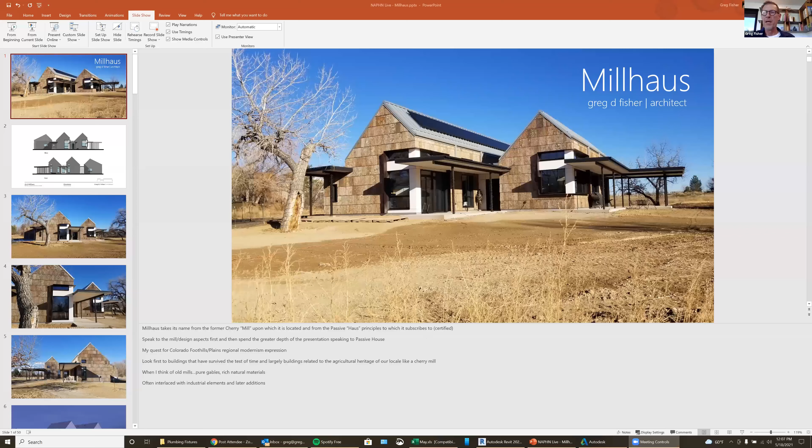So let me share my screen here. Are you all seeing that? Okay. Yep.

There we go. Okay. We call the project Millhaus, and the two parts of that: the mill is taken from the fact that the project is located on what used to be a cherry mill. Hasn't been for many years, but used to be a cherry mill. The original cherry mill structure is still with us, and it's to the right of this photo. It's a house now, doesn't look much like a house because it's been added onto so many times, but it

is indeed a house. And then the second part of the word, house, obviously spelled the German spelling H-A-U-S, and so that's sort of the passive house piece to the name and the metaphor. And basically, one of the things I've admired for several years is what's known in architectural circles as regional modernism. It's basically a form of modernism that is modernistic, but it still responds to a building's locale, as

opposed to maybe earlier editions of modernism, which somewhat ignored context and didn't think necessarily much about energy efficiency and performance and so forth, but made beautiful buildings that just kind of dropped onto sites. There's many examples all over the planet, but some that come to mind are Pacific Northwest and what Olson Kundig has been doing, and James Cutler architects. I also think of the work Lake Flato does in Texas and many other areas, and I think of Glenn Murcutt in Australia, just to name a few.

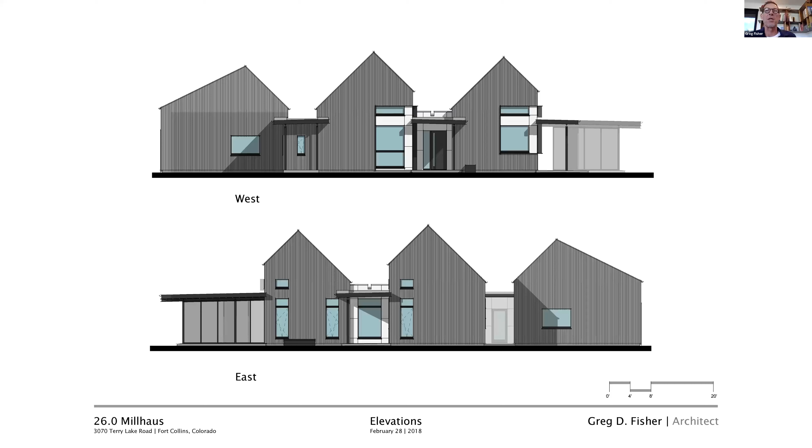And then to further enrich those more modern masses, we're again using natural materials. In this case, bark siding, echoing the cottonwood trees nearby, and then we have accents of white fiber cement panels at key areas like entries and these key corners that you see. Zooming into that a little bit, you can get a better feel for the bark. That is actually a cradle-to-cradle material.

It's harvested from a tulip poplar tree, native to the North Carolina area, and was provided by a company called Bark House. Then the white trim elements around the windows are a product called Richlite, which is an FSC certified paper-based product. And then the white panels are, of course, cement fiber with some recycled content in them.

Here's the back side of the house. Forgive me on the pile of furniture there. We're still in construction. We gotta get that tidied up and get better photos eventually here.

Speaking of the goals of the project, our goals were to downsize from our previous house, push high performance and sustainability. And I wanted to demonstrate that Passive House can be executed beautifully, not just technically. And then of course I wanted to also pursue my own design exploration.

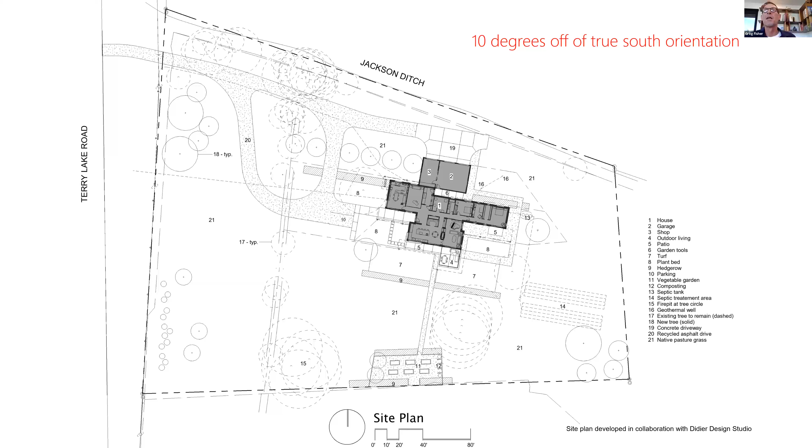Here is the main level floor plan. You can see those three gable masses are highlighted in gray. The bottom rectangle is the primary living spaces, kitchen, dining, living. The middle rectangle is the bedrooms and offices. And then the upper rectangle is the garage and shop.

The program for the house was intentionally modest. It's 2 bedrooms, 2 bathrooms, and 2 offices, along with the typical living areas, a laundry room and a mechanical room. And we're trying to make the size of the house as small as we reasonably could handle. We had some back and forth on that between my wife and myself, but I was aiming to try to get to about 2,500 square feet.

We ended up more like 3,000 square feet, but about 600 of that square footage is our 2 offices. We both work from home and have for many years, even pre-COVID. So I guess we got to about 2,500 if you take the offices away. And then the thought was that when this house is occupied by the next users, those 2 offices could become 2 bedrooms or a bedroom and a rec room or something of that like. And then another bathroom has also been planned for in that area.

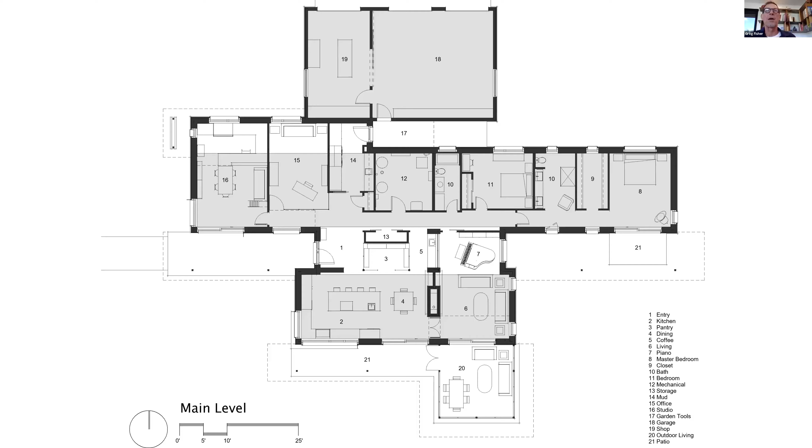This is the living room, so this was the area tucked around behind the fireplace. That two-sided fireplace, and again continuation of those natural materials, and then the steel, kind of the old gridded windows separating the coffee bar from the living room area. Always loved those windows in old mills.

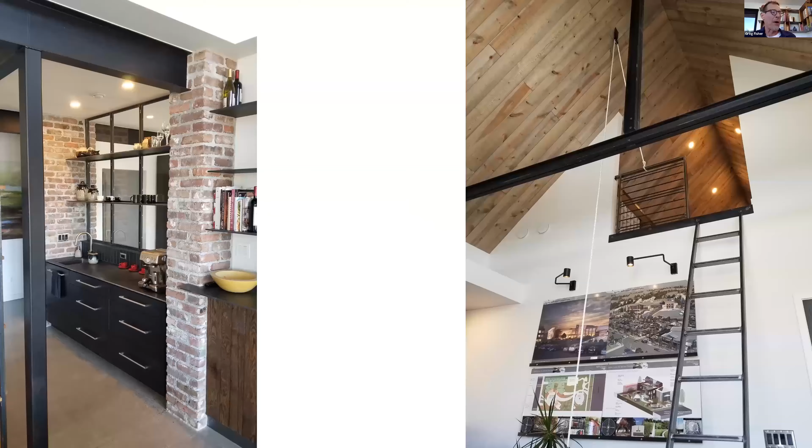And then talking more about the other half of the name, the house, the HAUS, the passive house.

My passive house story really sort of indirectly began somewhere around the turn of the millennium when I had kind of an awakening period where several things in my life changed, thinking in my life. But one of the preeminent ones was kind of my thinking about sustainability, and I wanted to live and practice much more sustainably.

And so initially, I found my greatest learning and experiences came through the USGBC, U.S. Green Building Council, and through LEED, and I immersed myself into several efforts in that area, in projects that go beyond LEED, working towards regenerative practices and projects, and was involved with several lesser known entities and systems in that regard.

But somewhere about 10 years ago, I would say, I started becoming exposed to passive house, first through a German friend of mine that had relocated here, and he was telling me about passive house, and I thought he was talking about passive solar, like so many people still think. But anyway, got exposed there and began to learn more and more through various local efforts.

And then ultimately, about 3 years ago, took a course from EMU Building Systems and became a certified passive house tradesperson. And so that's when things really started getting more serious for me. In addition to doing a couple of projects that were sort of near passive house projects, but not certified, the CPHT training through EMU really sort of solidified things.

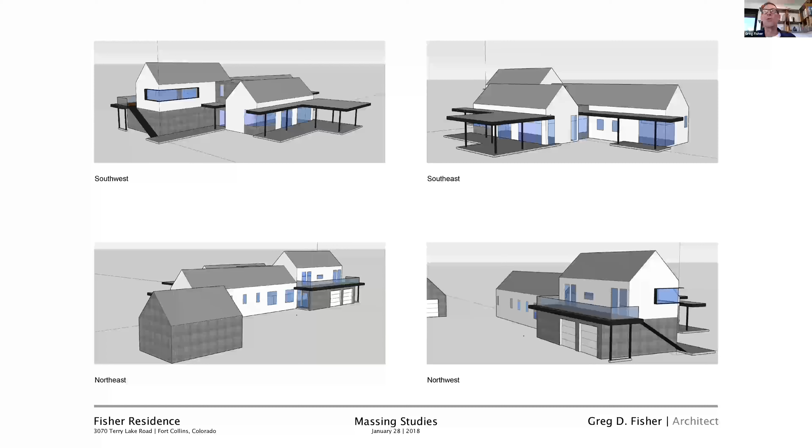But the report basically indicated that we were pretty much on track with the basic form of the house and the amount of windows and where the windows were put and where the shading devices were put, et cetera. We're pretty much on track to achieve certification, but we were really close. We didn't have a lot of buffer to spare. And so the windows that we would be selecting would be critical, as well as all the other variables, to make sure that we nailed them so that we didn't exceed as we evolved.

And about that same time, or shortly thereafter, my wife and I also came to the conclusion that we wanted to do a single-story home primarily versus a two-story. If you notice this image in the previous slide, there was a fair chunk of the project that was a two-story portion, but for various reasons, we decided to go to single-story. And single-story, as you might know, inherently makes the form factor worse because we're sprawling out more on the ground and enclosing the same amount of square footage with more envelope than we would have had otherwise. So that was starting to eat into that buffer. So we had to, again, really watch that closely.

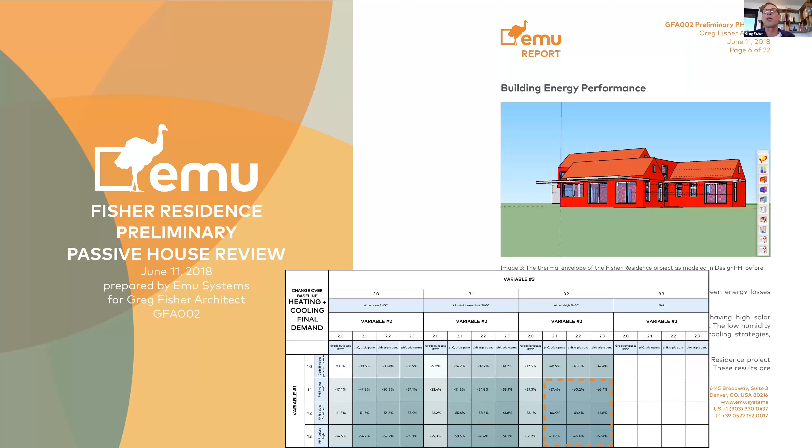And so Enrico at EMU and I both came to the conclusion that it made a whole lot more sense for the next phase of the energy modeling through DesignPH to move to my court versus his court, so I could play with all these various variables myself and get really quick feedback.

And that was super fun to be able to have that kind of quick feedback, and super fun when the software was working well. This was an older version. This was about 3 years ago, older version of DesignPH, and it was pretty buggy. And although some of that might have been me, I understand that other people experienced the same problems.

So it was also super fun and super frustrating, but ultimately it was really helpful to arrive at my sense of what I wanted to do with the forms and the shapes and all of that relative to the passive house goal. And I could pick and manipulate things to get to where we wanted to be to still achieve the goals. One other thing that was sort of frustrating at the time was the shading tools in DesignPH were not very sophisticated. So these flat roofs that you see here are solid, and I wanted to play with doing more open rafters or trellis elements to improve the performance, but the software did not permit that at the time, but that has since been remedied.

One of the interesting things to note is the form factor of my home is not super great. Most successful passive house projects that you see are generally one pure gable form as opposed to 3 gable forms that are connected with flat roofs. And so the better the form factor is, the easier it is to achieve passive house. And oftentimes that maybe gets emphasized pretty heavily, and I think people are scared to try some different forms. But ultimately we were able to make the forms a little bit more complicated and compound-like, and yet still achieve passive house certification despite not the ideal form factor. So

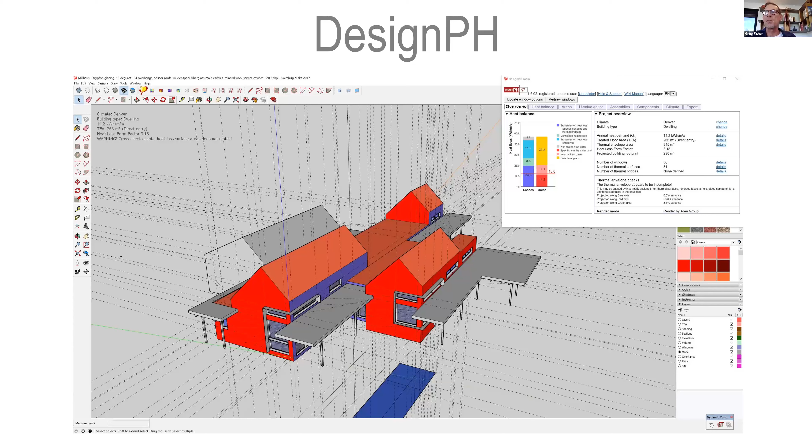the envelope, here's a cross-section of the building. This is all based on systems that EMU had done in-depth analysis to try to achieve systems that meet the passive house criteria for our climate zone and yet still be user-friendly. You can kind of see here that variation in the roofs. The floor system is pretty much the same assembly. The walls are more or less the same assembly, but we've got 3 or 4 different roof conditions in the assembly. Here's a little closer view of a couple of the wall sections.

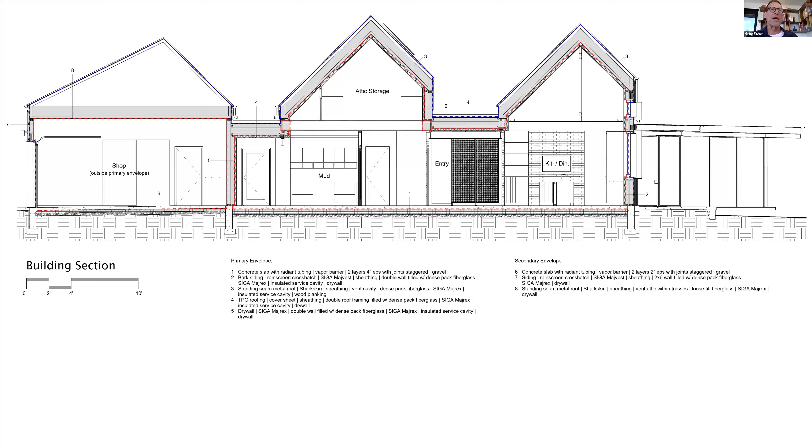And so basically the floor assembly is a 5-inch concrete slab that has radiant heating and cooling in it over a vapor barrier, over 8 inches of EPS. It's actually 2 layers of 4-inch with the joints staggered, and then foundation insulation is also EPS. Otherwise, we attempted to avoid foam insulation anywhere. We just opted for the foam underground because the other options, gravel and Gutex and rock wool, et cetera, were quite a bit more expensive than the EPS. Obviously better environmentally, but we weren't as worried about the vapor open versus vapor closed aspects in those assemblies like we were for the walls and the roof.

The walls are double walls with a service cavity. So basically you've got the siding on a rain screen, you've got a WRB sheathing, an outer 2x6 wall, a gap, an inner 2x4 wall, then the air and vapor control layer, and that's all filled with blown-in dense pack fiberglass. And inboard of that is a service cavity that is 2x3s at the walls and 2x4s at the roof. And all of our utilities are running in that service cavity, and then it's insulated with batts, and then the interior finishes.

The roof predominantly, the image you see on the upper left, is primarily parallel chord trusses that are treated somewhat in the same fashion as the walls, other than it is a vented attic. So there's a vent space there, the truss, the air and vapor control layer inboard of that, and then the 2x4 service cavity. And then we have a couple other roof sections where we have a conventional flat chord truss with an attic above. And then we also have some attics that are unvented. And we had to do a little bit of gymnastics with the local building department to prove that out. Enrico provided some very good modeling and reports to prove the case there.

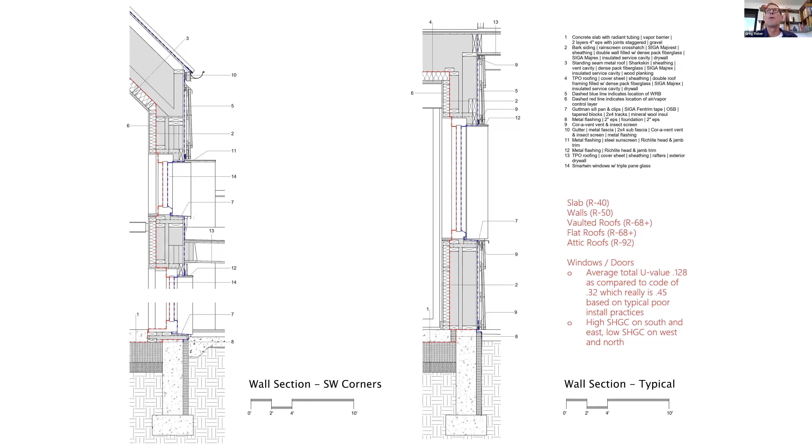The systems for the house: as most of you know, Passive House lowers your loads to the point where your HVAC systems can be much less robust than they are for a typical house. However, my wife and I both opted for radiant floor heating and cooling due to our love for that approach, and also the time frame we were making that decision.

We happened to be traveling in Europe, and we were freezing our butts off everywhere we went, which had an influence on the decision. So we did not need to do that. A typical mini split system would have worked just fine for the house.

Another goal of the project was to be fossil fuel free, both for environmental reasons and at the site, so it would have cost a bit more to bring that in. So we ultimately went with the ground source heat pump, supplied by a couple of 250-foot deep geothermal wells.

Of note, if we would have gone to the mini split system, it would have saved somewhere between $15,000 and $20,000. So it was a significant choice to make that decision. We're well aware that we didn't have to do that. That could make Passive House more affordable.

You also might be interested to know we looked at air source heat pump versus ground source heat pump. If you're looking purely at those costs alone, there'd be a significant savings to go to air source heat pump there as well. However, when you applied the federal and the local tax credits to the heat pump scenario, the differential ended up only being about $2,000.

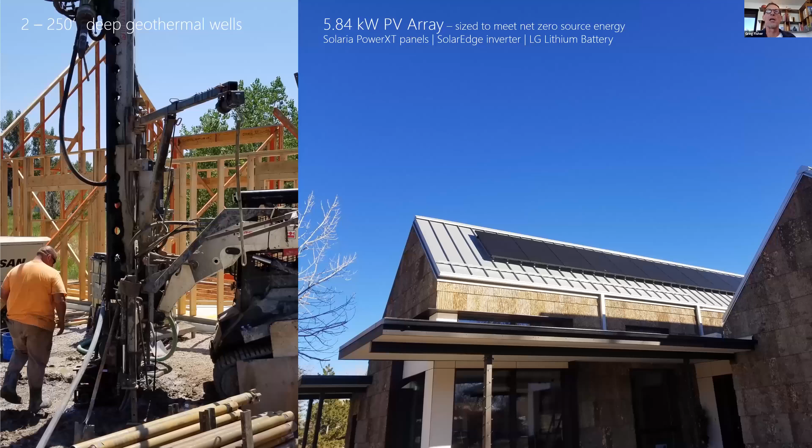Then we have a PV system, a 5.8 kW system you can see on the right. This was sized by EMU Systems to meet net zero source energy loads based on the PHI primary energy renewable method. And then, like I said, we just got a battery here lately, so we can shave our nighttime peaks and access our nighttime potential and shave daytime peaks, etc.

Getting into the details of the house, I'm going to just touch on a few. There's obviously a ton to go through. One of the interesting things that EMU always talks about, Enrico in particular, is thermal breaks, and some are elephants and some are mice. We want to try to remove the elephants, and not worry quite as much about the mice. The elephants generally have to do with concrete and steel because they're much higher conductors, of course, than wood.

One of those elephants in our case is the foundation. If you might recall from the floor plan, we had that shop and garage area that's connected to the house. The house is where the primary thermal envelope is, and the garage and shop are secondary envelopes. So we needed to break that foundation. It's a very easy detail as long as you do it at the right time. Basically there's a piece of foam stuck in the form at that point, and the steel rebar runs through. So technically the rebar is still bridging, but it's a smaller bridge.

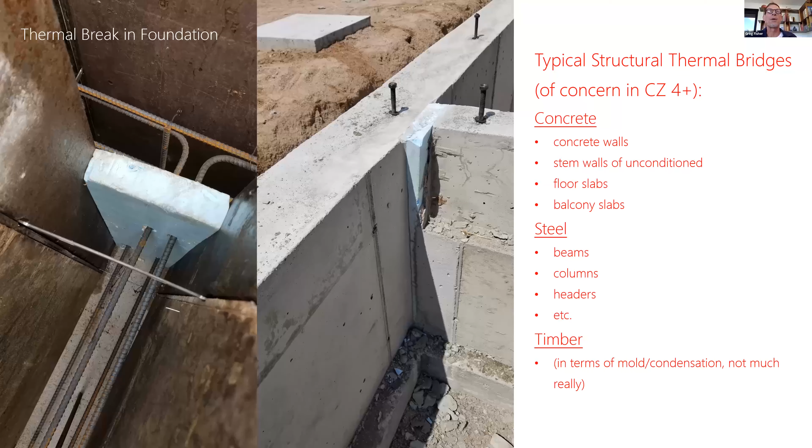So we just did a little workaround where we kept it entirely outside of the air and vapor control layer within the walls. Again, not a super hard deal, it just needed to be thought about at the time of foundation and worked into the formwork. And obviously you've got a little bit of a sequence, bringing in a plumber a little bit earlier or doing that yourself.

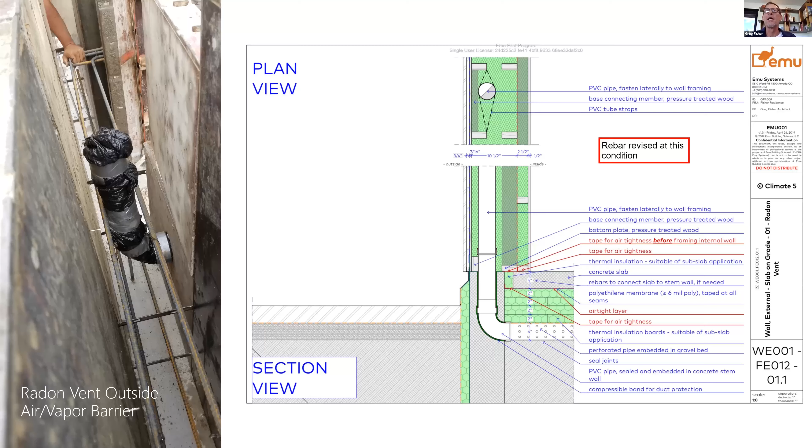And then here are some details about sealing around the blockouts. By the way, I've heard someone say primarily what this is all about is taping and caulking and caring. And I think that is really true with these details here. It isn't a massive effort. It's more just about taking the time and thinking about it and doing it.

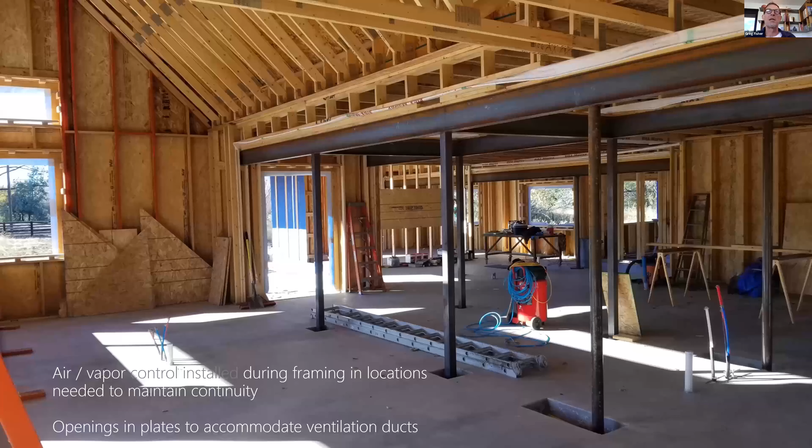Moving into the framing stage, this won't be unique to most of you, but we had to work our air and vapor control layer into the framing. So you see in the upper right there, the Siga Majrex, in between plates on top of that beam, so that the sealing on the underside of the left framing, when we put the control layer on that, can be continuous through those plates and then reach the flat ceiling on the right-hand side. You might also notice there's some openings in those plates in anticipation of the ventilation. Easier to cut those out now than later.

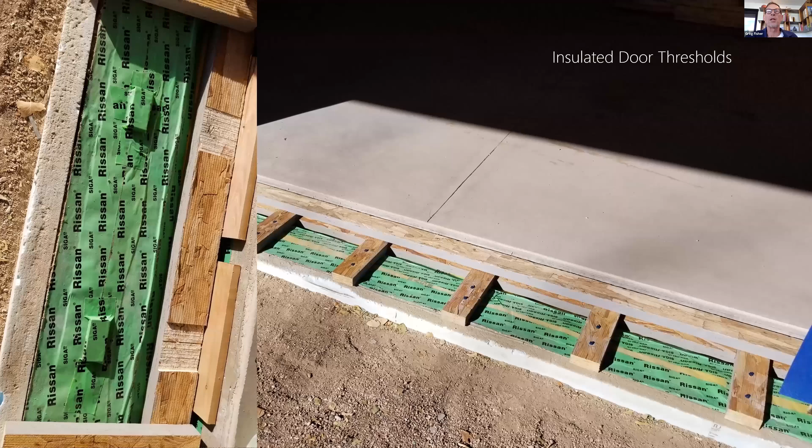Here's the threshold detail. This was probably the trickiest detail in the house. Because we're slab on grade, the thresholds were more complicated. Obviously if we were on a crawl space, this detail would be a little bit more conventional, but with the slab on grade, we needed to stop the slab short. As you all know, the typical way of doing these openings is just have the slab run through the opening, out flush with the foundation, and then you set the door on top of that.

The doors that go on top of these are actually pretty heavy, robust doors. They're 10 foot wide and 9 foot tall lift and slide doors. So this had to be pretty robust to carry that, and yet still not be a thermal bridge. So the detail we ended up with is kind of this railroad track detail, where we've got these 2x4s spanning from the top of the foundation over to a 2x4 that's resting on the insulation underneath the slab.

The mistake we made that I wouldn't make a second time is that when we poured the foundation, the blockouts in the openings, typically when you do those, you're not too worried about quality control at the top of that blockout, because you're just going to pour the slab over the top of it anyway. And we didn't think any differently at the time, unfortunately.

But later, when I started to put these railroad tracks in, I quickly realized that the top of that foundation was completely inconsistent. And so this required all that dadoing that you see on the left there of that plate, and then shimming in some cases of that foundation and taping it. So there's definitely an easier way to do this detail. Primarily it would be just to get that foundation flat, but there may be some other solutions as well. But this was a tricky one.

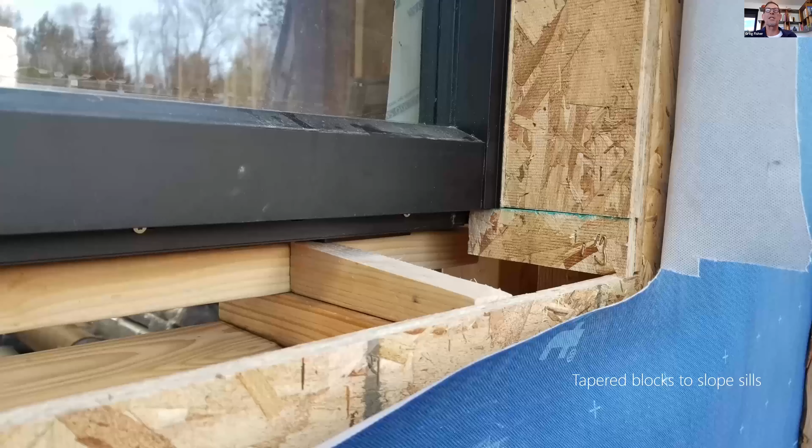We're actually now looking at a window sill versus a door threshold, but the idea is the same. On top of those blocks that you saw in the previous image, we created these little taper blocks to create the slope of the sill, and then the jamb you see on the right there got packed out so that the framing and the insulation could wrap around the face of the SmartWin windows. These windows allow you to cover them up, other than the sill condition, and insulate. As you all know, the frames are the weakest part, so this helps to mitigate that.

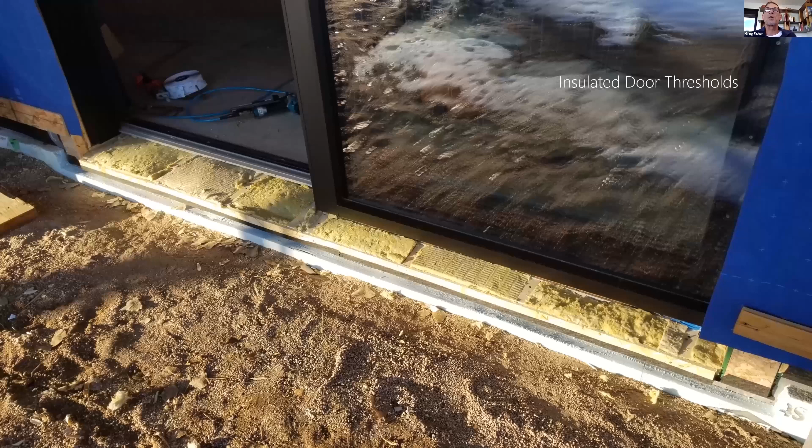We're back to the threshold here, but again, the same idea. Then in between each of those railroad tracks, we insulated with rock wool. This was still in the construction phase, and so that was subject to getting wet. Rock wool obviously is hydrophobic, so it's a great solution for this condition. It's still subject to that. Then that sloped condition gets covered up with OSB, and then after taping, we inserted the Gutmann sill pans, a beautiful product from Gutmann in Germany.

Took a lot of effort to figure out how to make those all work. I'm sure they've got that system down to a science, but it was new to me, so it took a little bit of practicing with that.

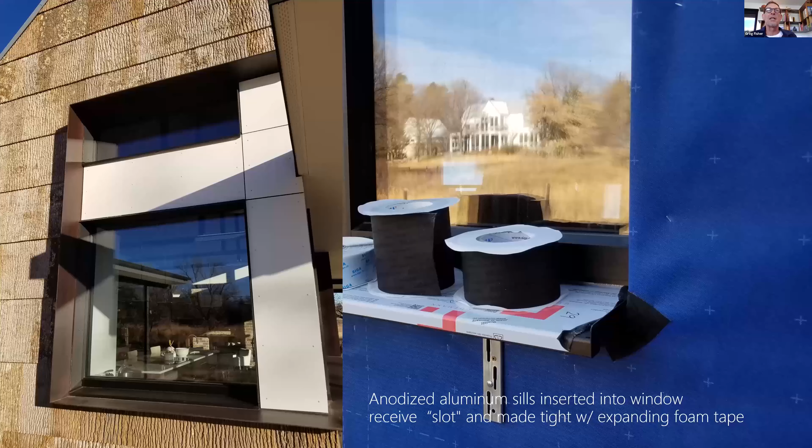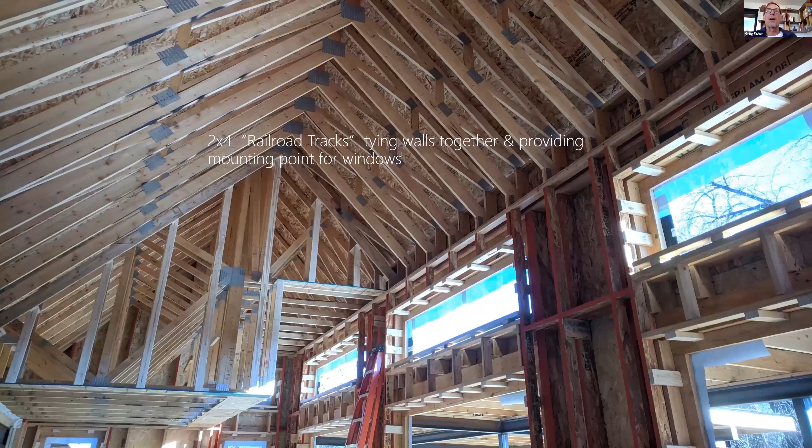I have to skip the outside taping because of those photos, but on the inside, you can see back to the railroad tracks here, connecting the inner walls to the outer walls. The windows, before they were put in the holes, were pre-taped so that we could get access to the windows. And then after they were in and taped, we put the inside vapor control layer up over the 2x4 framing, sealed that all up and blew the insulation in.

I should mention, we also put the service cavity framing to help hold the Majrex. Interestingly, the 2x3s around the windows had to be left out until we completed the insulation in order to stick a hose in and blow into that cavity where the railroad tracks are. This blue tape is marking a cavity that did not get filled the way it should. So we had to leave that 2x3 out, mark it with the blue tape, get the insulator to come back and top that off, and then add the 2x3 later. Not too much of that happened, but some. And now you see after the insulation's put in, the 2x3s are completed.

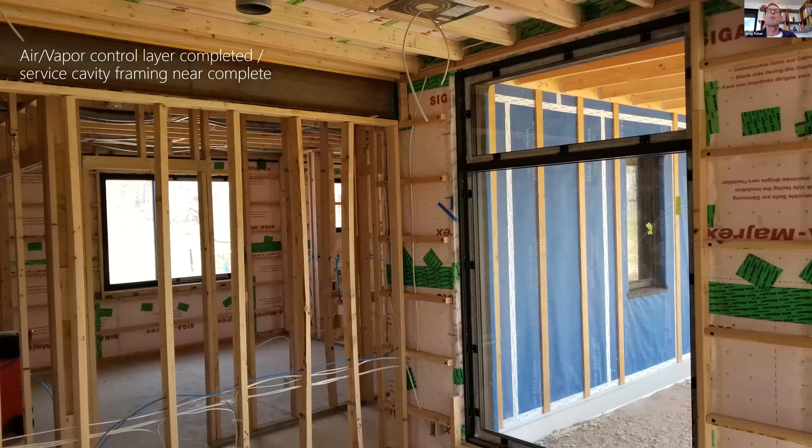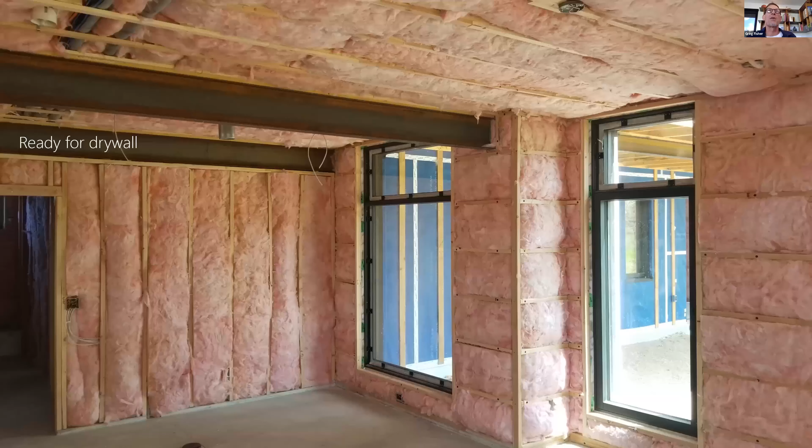It looks like I should wrap up in about 5 minutes, so I'm gonna move this along, but another element here is the steel detail. We have several places where steel beams meet outside walls, and the typical condition is for the steel to run out to the outside face of the wall framing. What we did is we held all of the steel back about 1.5 to 2 inches to be able to sneak in a rock wool batt behind the ends.

And then a tricky little detail that Enrico pointed out to me just at the right time as we were framing, putting those plates on top of those steel beams: he mentioned this great tip to stop the first one short of the wall. You can see where that arrow is pointing, there's a gap there, and that allowed us to tape the air and vapor control layer straight to the steel as opposed to the wood. The tightness of that condition is much more enhanced when you're connecting the control layer to steel versus wood. So interesting little detail. I'm going to skip that for now.

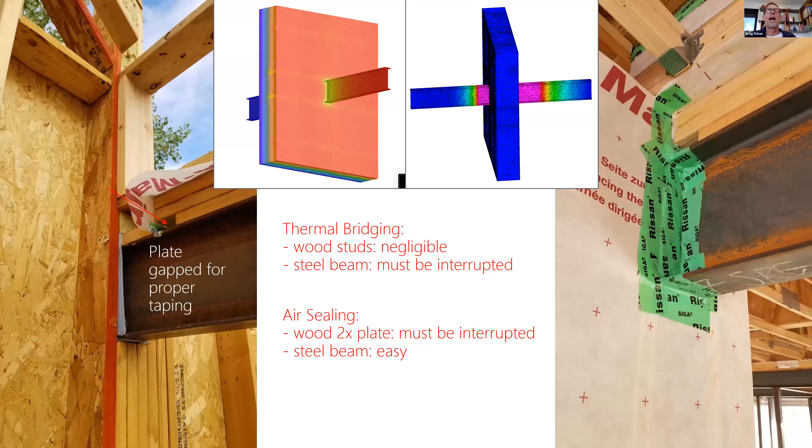So ventilation. Something I have always done for all my projects, commercial and residential, is try to work closely with the mechanical designs to coordinate where all of the ductwork runs through buildings to make sure we've got a route for that. But I had to take that to another level with my own house, building this myself and not having a true mechanical engineer involved. I did this layout of the structural framing, the service cavity framing, the lighting and the ventilation. I would normally have thought of that as drudgery work, but it became fun. I think Passive House has given me a greater appreciation for some of these systems, particularly HVAC systems. So an interesting side effect there.

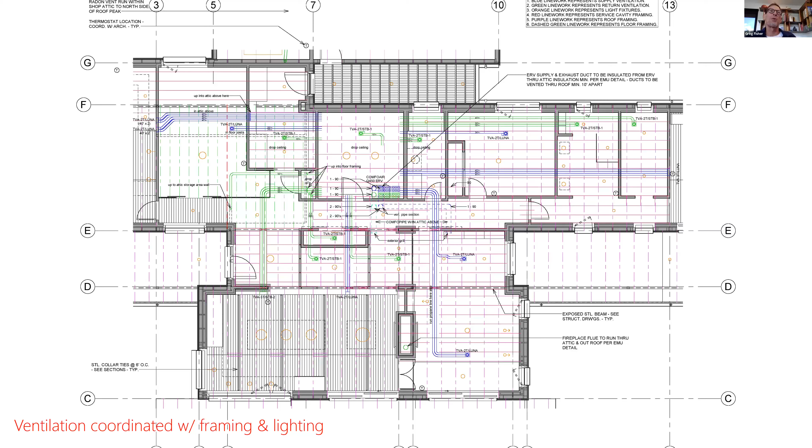An interesting note is the Zehnder boxes for ventilation don't quite fit in a typical 2x4 depth. They need an extra 3/4 inch, so you can see the 3/4 furring on the bottom to make that happen. Maybe that can be improved upon someday. Furring's not a huge deal, but a little added step there.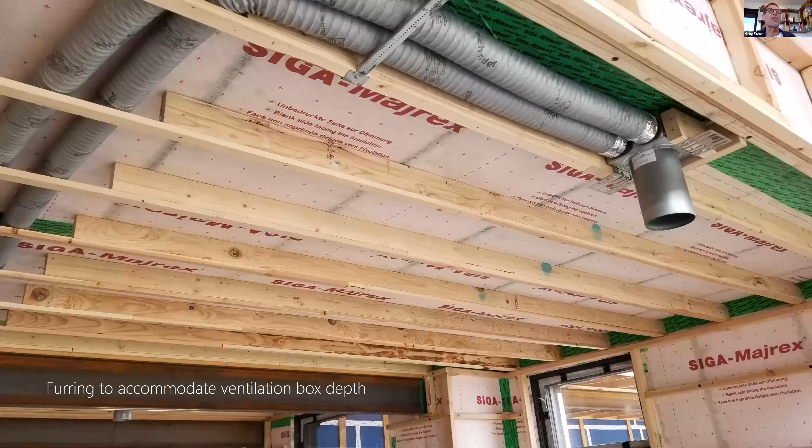Same thing applies here. You can see this is a wall condition, and it's hard to tell in the slide, but behind that box, and you can sort of see it more to the right of the box, is green tape. We had to create a little pocket recessed into that truss cavity, in this case, that was all sealed up in order to fit that Zehnder box in that 3.5-inch framing without having to fur out the entire wall.

Here's another view inside the primary space. You can see more completed now, air control layer throughout. You can see the collar tie brackets on the left and the right there. They were mounted to solid blocking out inside of the control layer, so we didn't penetrate the control layer with that steel. You can see those vent holes from the previous slide now in play, where they've actually got the vent piping through them. See a few more cases where there's blue tape marking cavities that weren't quite full that had to be topped off.

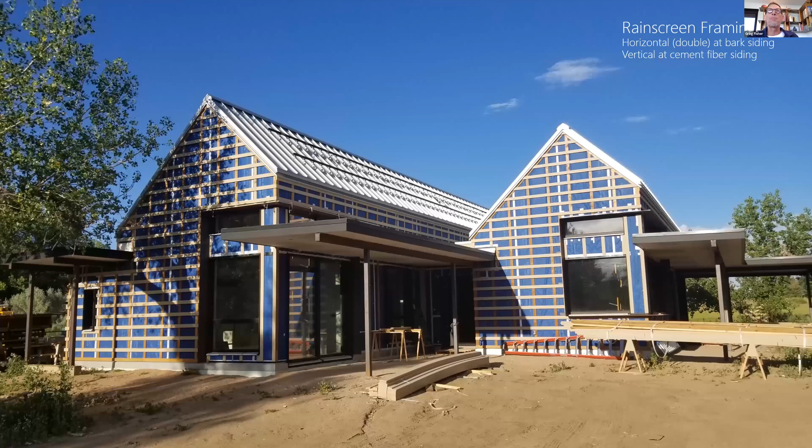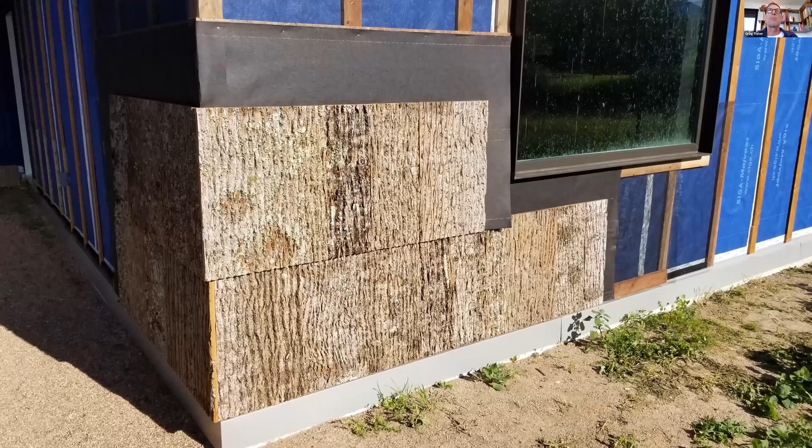Here's the outside rain screen. Had to be double layer at the bark siding, which is nailed horizontally, and single layer just vertical at the white cement fiber. Here's the bark siding. Interesting learning point here, the tar paper that's between the layers of bark. I initially didn't think that was needed since the house water control layer is back there, the SIGA Majrex. Didn't seem like it was needed, but later learned that it needed to be there to protect the top of the bark shingles. So basically the joints between each shingle would allow water to get in and potentially get on top of the course below that. So that tar paper is there to protect that, the way they've been installing it for many, many years.

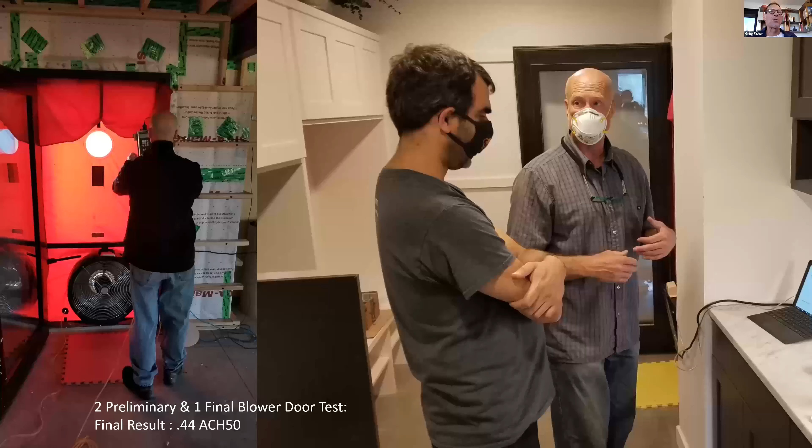There's our blower door test. We achieved a 0.44 ACH50. We did 3 blower door tests, 2 preliminary and 1 final. Could talk more about that if time permits.

Living in a passive house. We've been in here since October now. Went through the winter, went through some very cold spells. We had a spell in February that it was -10 for days. We wouldn't even know that inside the house if we didn't go outside. It was so well controlled. These big windows and doors, you could walk beside them in your underwear and not feel any drafts. So fantastic. We've had a lot of wildfires in our neck of the woods the past few years, and so having that indoor ventilation system run continuously definitely gives you a lot of peace of mind in that regard.

Our ventilation system has worked quite well. We had to work out a couple of bugs initially, but those have all been worked out. Things have been going well. Have changed my filters twice now. Both times found a lot of ash in them from those fires. So good to know that's all being caught. Sound is another pretty interesting issue. We live next to a state highway. It's not a major volume state highway, but there is some significant noise there. And again, if our windows and doors are closed, we have no perception of that whatsoever.

I'll conclude with a photo here of what's yet to come. So we're currently trying to get some landscape in between rain. We've been getting a massive amount of rain and snow the last few weeks, and we're actually a couple inches above average rainfall, where the rest of the state and many other parts of the country are in a drought period. So we're happy about that, but it's definitely delaying the landscape. But this is sort of what's yet to come. So with that, I'll open it up to questions.

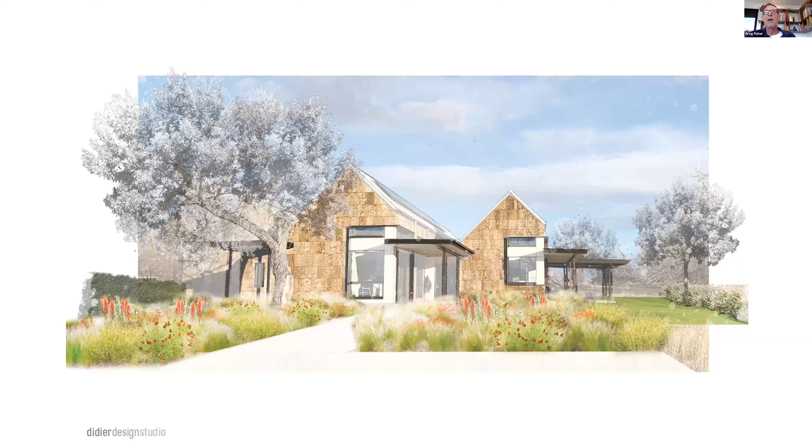And due to the fact that we had framing at 2 foot on center versus a more European module of framing, the SIGA Majrex did not have anything in their corporate criteria that allowed for that setting of the framing. Okay. And so there's recommendations off the record that we could do, and they felt really good about it, but not on the record. And so we had to do a bit more framing there to accommodate that.

We also taped all of the staples in the SIGA Majrex in those locations, which isn't necessarily a requirement of SIGA, but we did do that just as an added measure. But the story could get much longer on all of the spacing aspects and how you roll the Majrex out perpendicular to framing versus parallel to framing, et cetera.

But ultimately the building department accepted it as long as it was 100%. They did a special inspection on just those roofs in addition to their normal inspections to verify that that was all in good order. So that's the short story.

Wow. Well, let's hear more tomorrow. We'll get into some of the details. Yeah, I'll send you the 20-page report. We'll hand you the second half of the meeting.

Yeah. Hey, we have a heat pump question. Yeah. Go ahead, Ken. Well, I was just going to bring that up. The heat pump question from William Boston that recently moved here from the UK. Welcome. So many great things happening in the UK with Passive House. Happy to have you here to join the fun.

With heat pumps and Passive Houses, often the case, especially with underfloor heating, the heat loads were so small that the heat pump would cycle, reducing the efficiency. Have you noticed any issues with cycling on the heat pump? No, and I'm probably not the best person to speak to that. My mechanical folks could probably better speak to it, but the heat pump that we did select is a 2-ton heat pump. So it's a smaller heat pump designed for the smaller loads.